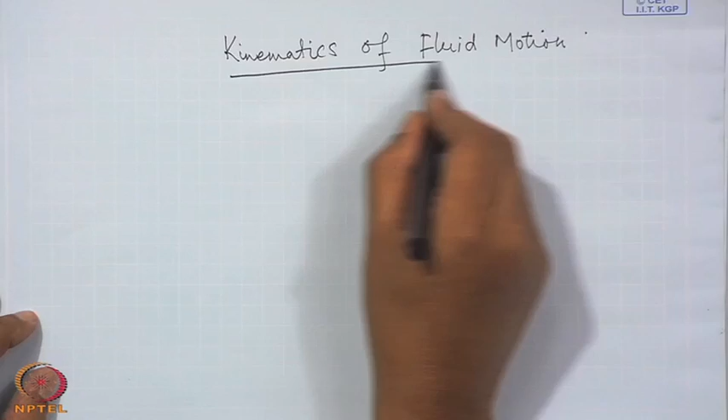So, in this Lagrangian description, what we do is define the velocity of a material fluid element.

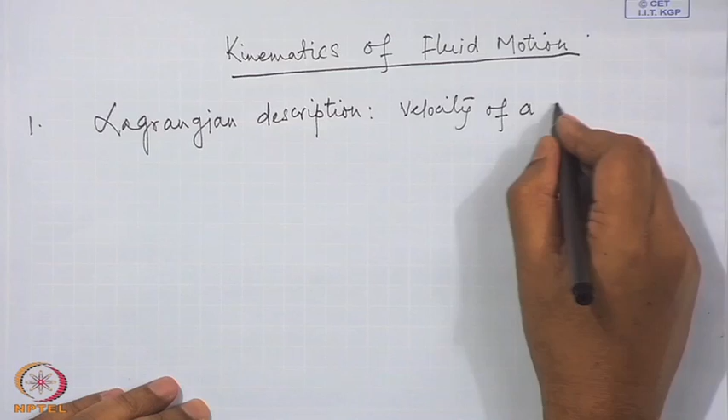When you see the word element, what we mean is basically an infinitesimal volume of the material or of the fluid here, infinitesimal in the macroscopic sense, not in the microscopic or molecular sense.

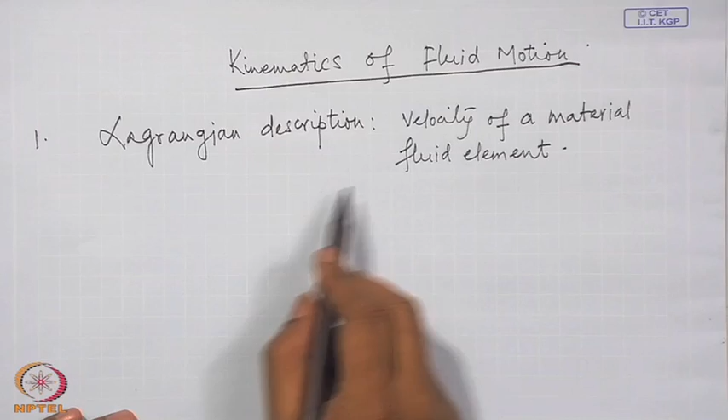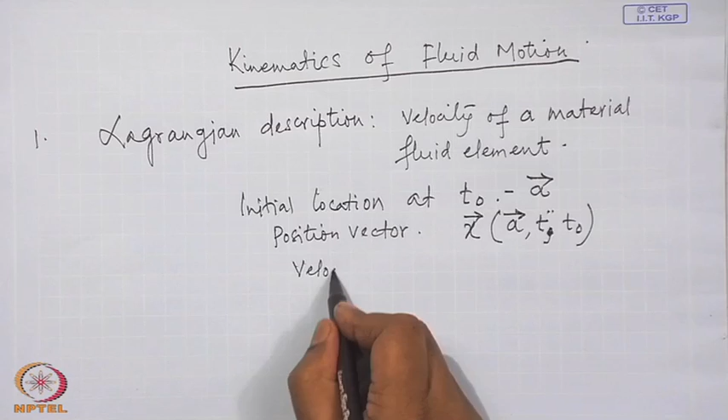The position vector of a particle which was at a location, the initial location of the particle, is the identification, location at say time t0. Then the position vector with respect to that, you may denote it by anything, say x, for that fluid element which was at this location. Then at a subsequent time, the position changes, and the velocity, as you have already defined, let us call this v, or v_i, is as before.

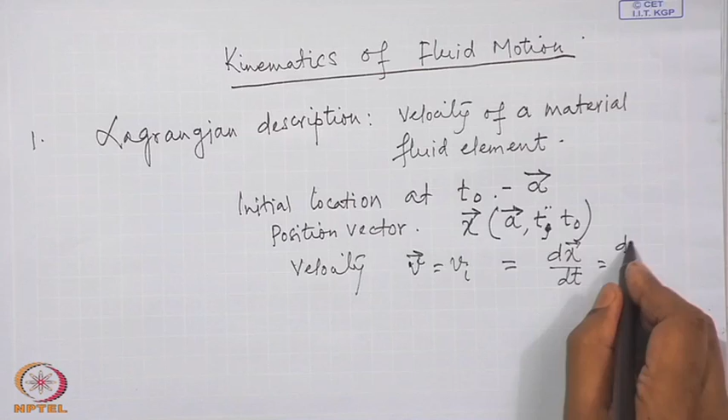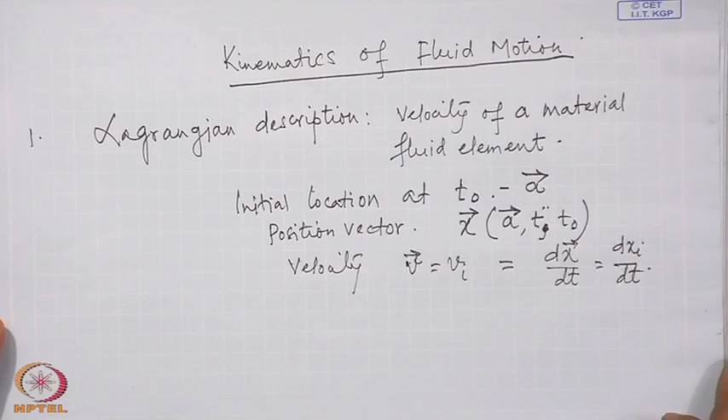Very simple description. However, this description is not very popular in fluid mechanics. We will later see that if we use this Lagrangian description of fluid motion, even the dynamical equations will appear simple. However, they will just appear simple, but they are much more difficult to solve, even though they appear simple.

Also, in the case of fluid, since there are an infinite number of elements and the relative motion between the fluid elements is quite large, to describe a fluid motion you have to identify a large number, an infinite number, of fluid elements and describe their motion, which is also quite cumbersome.

Also, we will see subsequently that often the flow will be defined as steady state flow, and describing steady state flow in the Lagrangian concept will also involve some complexity. So, this Lagrangian description is usually not the preferred description in fluid mechanics. Of course, there are certain cases where Lagrangian description is used, but most often another concept is used to describe the fluid motion. This other concept is known as the Eulerian concept.

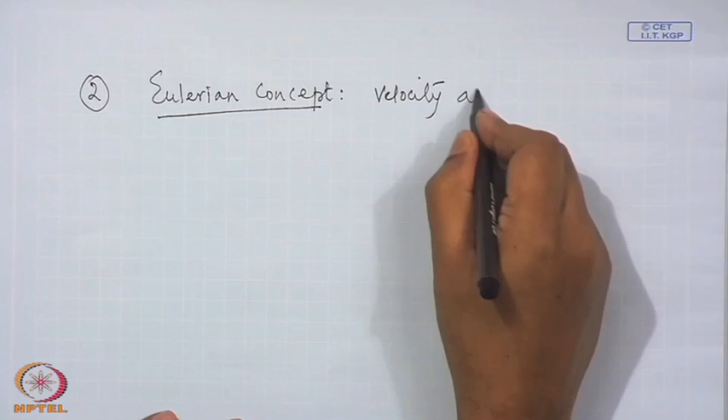What is done here is that the velocity is defined not for a particular fluid element, but at a point in space. So, velocity at a point in space and time, velocity at a point in space, at any instant.

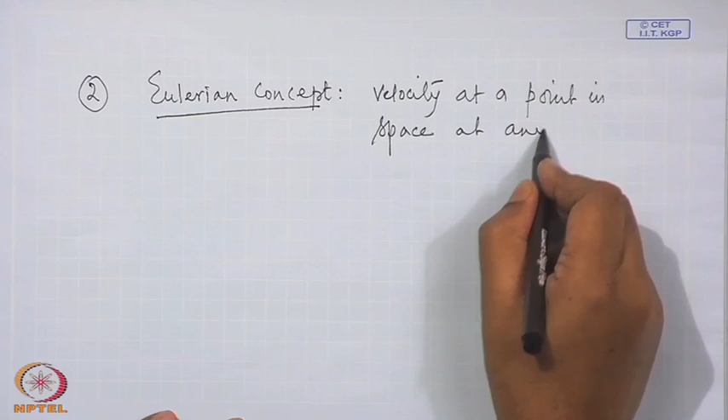That is, you identify or locate the point, say this point x, y, z or x1, x2, x3. So, the velocity at that point, how much is it? Just like a field description, we are treating velocity here as a field. The velocity field assigns a certain velocity at each and every point in the flow field. The velocity at this point is this much. It is not fixed to a particular particle, it is fixed at a point.

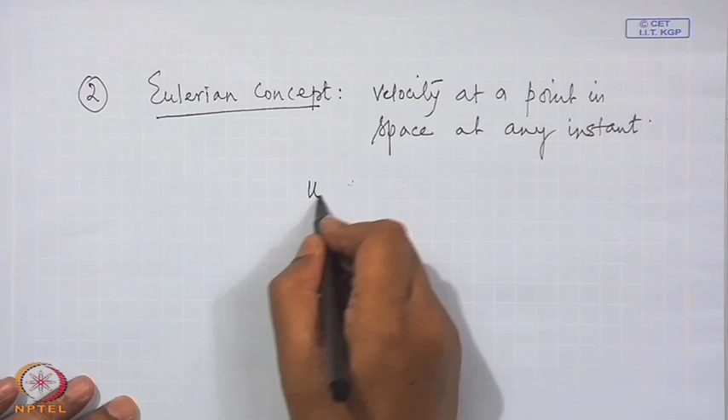Any particle which passes through that point at that instant, while it is passing through that point, will have that velocity. So, here the velocity will be defined by u as a function of x and t, or in our indicial notation, u_i(x_i, t). Now, x, y, z, remember in this case this x is not the position vector of a particle, but just a point in the space.

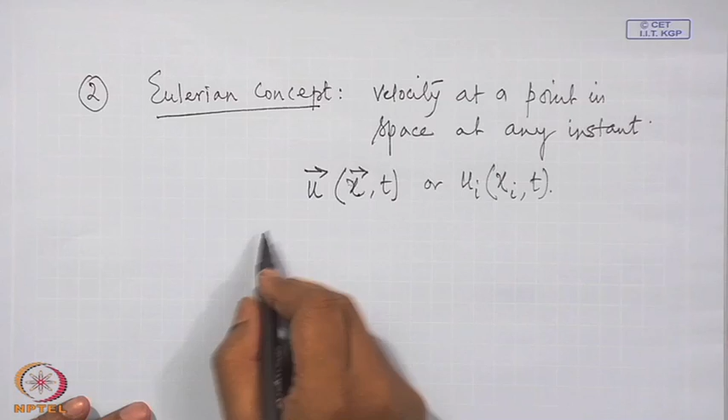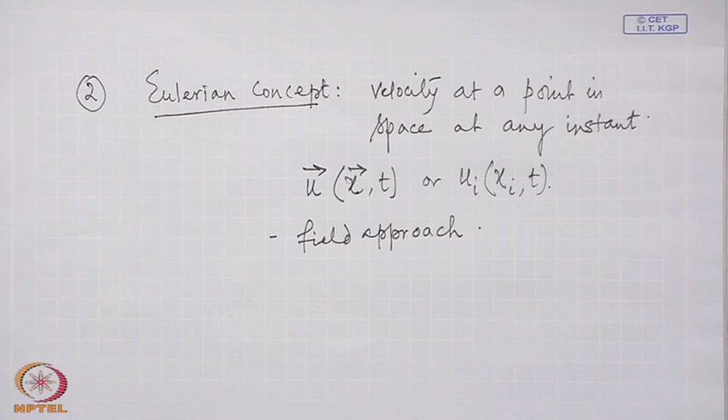Field approach. These two approaches are often called, this Eulerian approach is also called a cinematographical approach. It is like a cinema - you are focusing only on the screen, what is happening there, not anything else. Here also you are focusing at a point in the flow, not the particle - what happens to that particle, where it is going, that is secondary. Your primary interest is a particular position in space.

Similarly, the Lagrangian concept is also called a historical approach, where you look to the history of the element.

Now, associated with this point concept, you can also have a line in space, or a surface in space, or a volume in space. The surface in space is known as the control surface, and similarly a volume fixed in space is called the control volume. So this concept is also sometimes called the control volume approach.

We will see that the dynamical relations often need the acceleration of the particle or acceleration of the body, which is quite obvious or natural in the Lagrangian concept, because in Lagrangian description we are using the velocity of the particle. So if we differentiate with respect to time, we get the acceleration of that particle. Of course, while differentiating, you have to always remember the initial position by which the particle is identified.

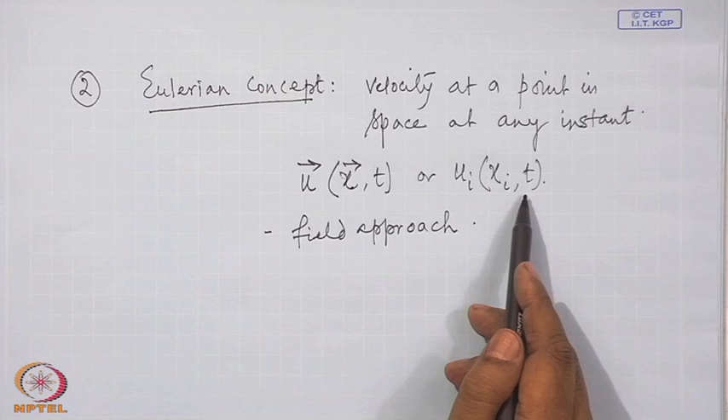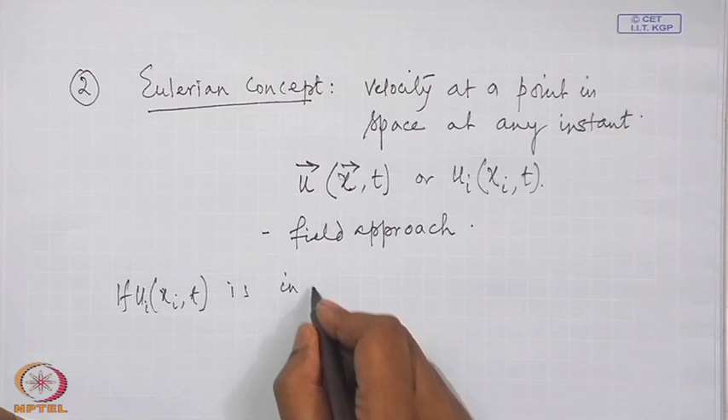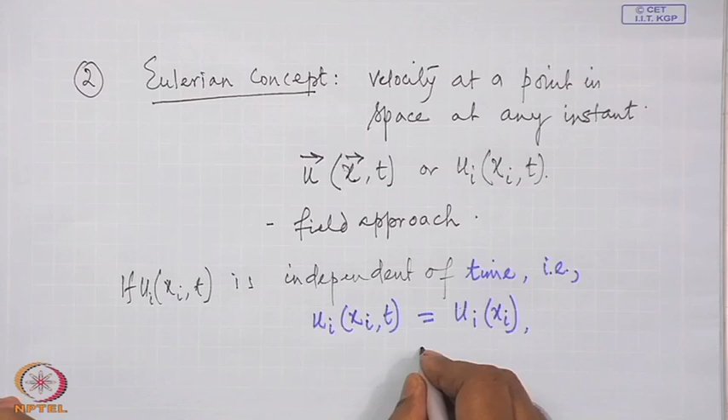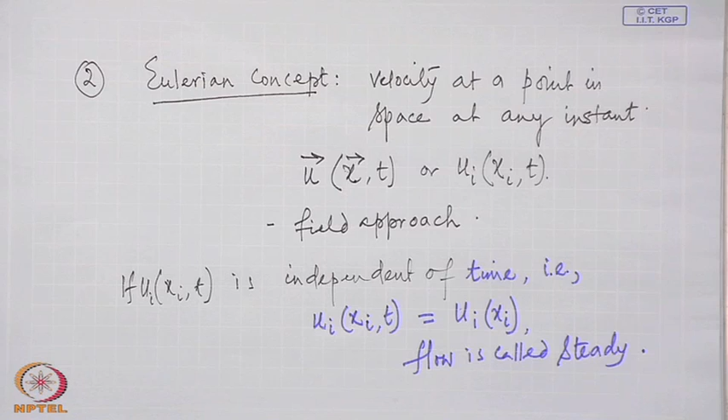Now, for a Eulerian description, if the velocity field is independent of time, that is this u_i(x,t) is independent of t, then the motion is called steady flow. And similarly, if it depends on time, that is at each and every instant the velocity at that point is changing, then the flow is called unsteady flow.

Three lines in flow are very important concepts. The first one is called the streamline - there is no real first, second, and third, you can call any of them first. Streamlines are those lines to which the velocity vector at each point is tangential. The velocity vector is tangential to each and every point on the line - lines that are tangential are called streamlines.

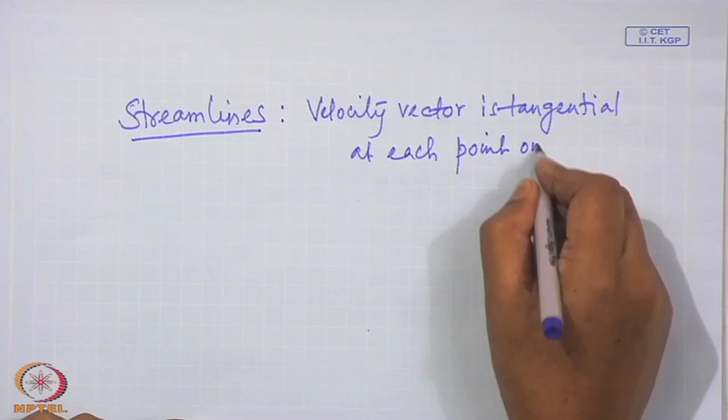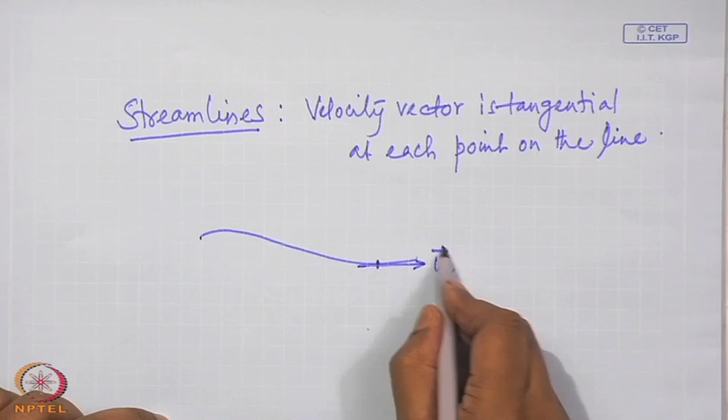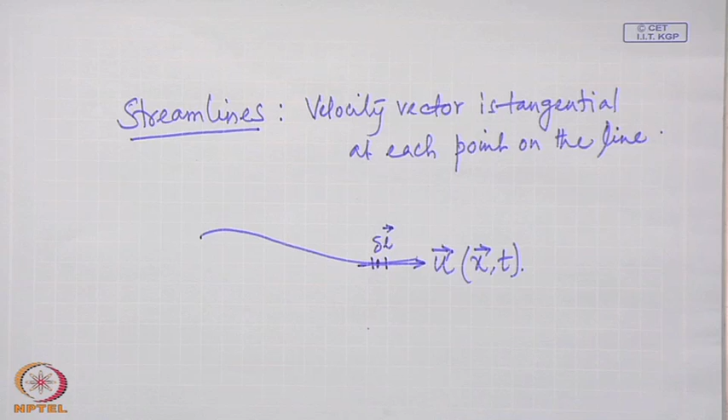So let us think about a line, and at this point we consider a point about x location, and let us say this is the velocity vector. We may consider a small line element delta L. Then what will be the relationship between u and delta L? Is there a relationship between u and delta L? No relation? Yes - complete it, yes. Cross product is 0. U cross delta L is 0.

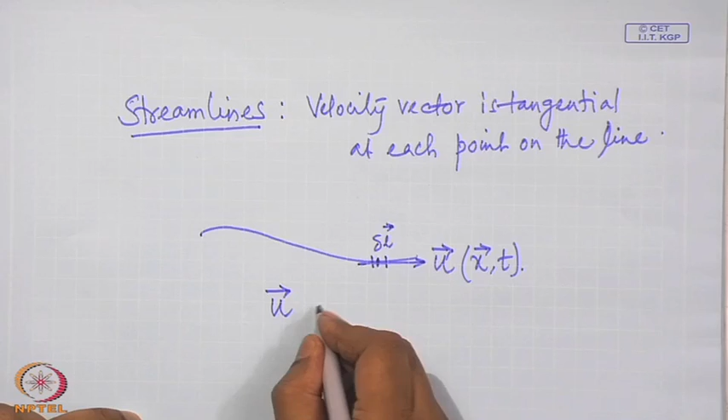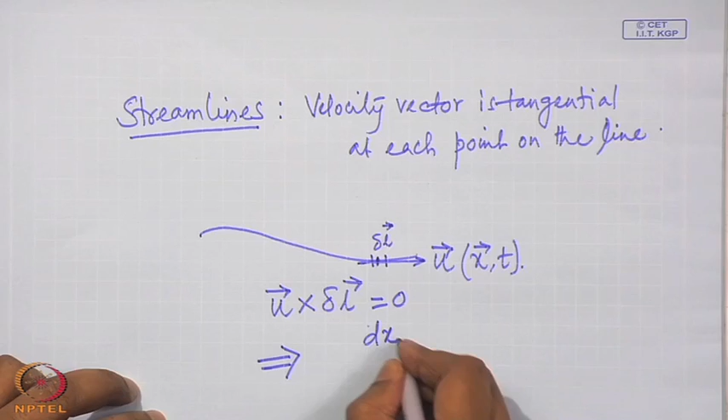Which of course we can write as dx1. This u1 as a function of x and time - I am not writing that x and time all the time. It is to be understood that u1, u2, u3 are all functions of position and time.

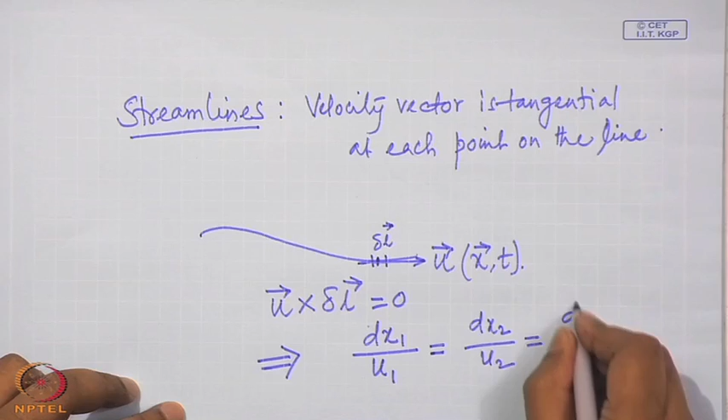So you see that this way you can find the equation of streamline. If you know the Eulerian velocity components, you can easily find the equation of streamlines. Streamlines are very, very useful to describe fluid motions.

So these streamlines will be a function of time? Yeah, these streamlines will, if the velocity field is a function of time and unsteady, then the streamlines are also unsteady. The streamlines will change from time to time - at each instant we will have a different set of streamlines.

The other line is called the path line. These are simply nothing but the trajectory of the fluid particles - the path followed by the fluid particles or the fluid material elements.

Just to differentiate, a fluid element which really consists of particles of fluid, we will usually call that a material element, material volume, material surface - meaning the volume is composed of only certain fluid particles. A material surface is a surface formed by certain fluid particles, while a volume, when you just call it a volume, will just mean a spatial volume, a volume in space. So the path lines are trajectories of fluid particles or material fluid elements.

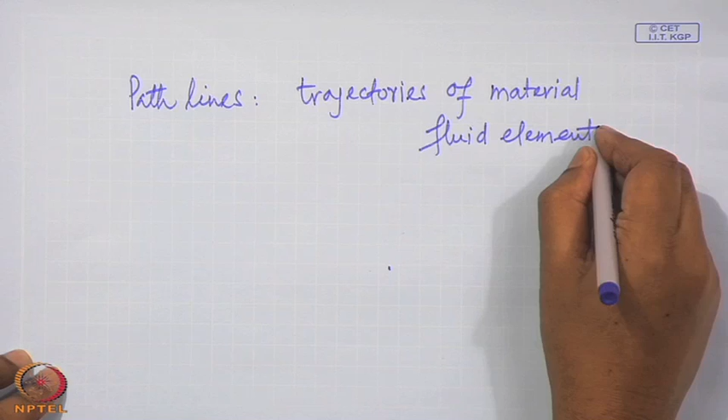If you use Lagrangian description, this is of course quite straightforward, as you have found trajectory of various bodies in your mechanics course. The same approach when you are using Lagrangian description, that is when you are defining velocity of material fluid elements, just integrate it and get the trajectory.

The approach will be similar even in case of Eulerian description. Only thing now you have to assign that, see, even the Eulerian velocity at a point is also the velocity of a material element at that particular instant when it is passing through that point. The Eulerian velocity is assigned to a particular point in space. Now, imagine a material element passing through that point at that time. So, at that instant, that material element also has the same velocity.

What is the velocity at that point? Now, fix this material element and integrate. So, while in this case also there is an integration involved, but this integration is with respect to that fixed material element.

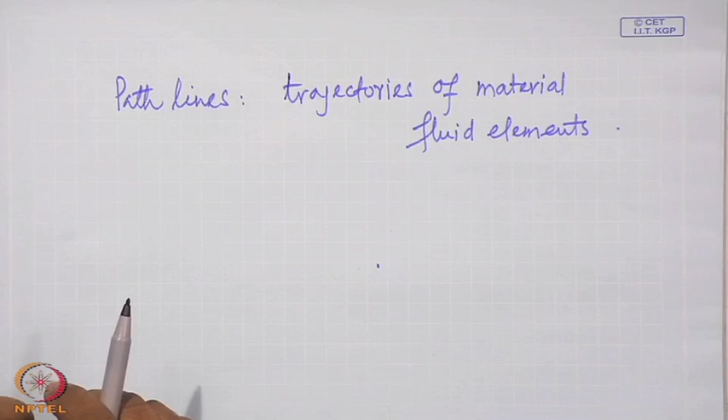So, there is the third line which is known as streak lines, which is very important as far as physical observation of the flow. If you want to observe the flow in your experiment, this of course, you will be doing in your experimental or laboratory classes in aerodynamics, and they are called the streak lines.

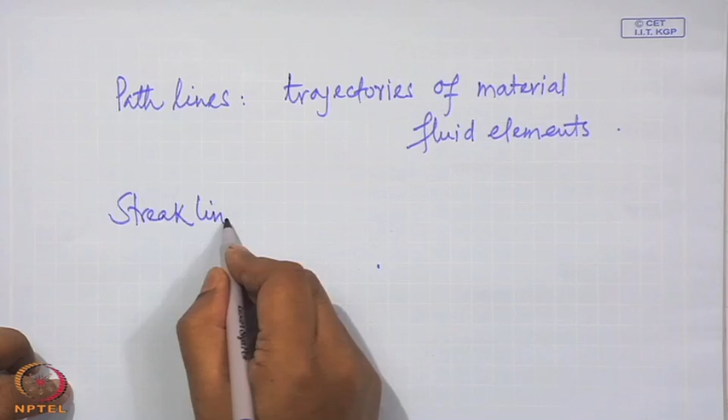Can you suggest how can you see a flow of air? Okay, inject some colored dye, inject a dye, fine. Now, you will inject at certain point, just think that your injection facility is such that you are injecting at a point. Then what you will see? You are injecting dye at a particular point in the flow. What you will see? This dye will spread.

Since you are injecting at a point, it will spread in a line. What is this line? This line is called the streak line, but what is this line? Is it a path line? See, path line is the path of a particular trajectory. Is this streak line a path line? Not in general. For special case it can be, we will tell you what the special case is, but in general it is not.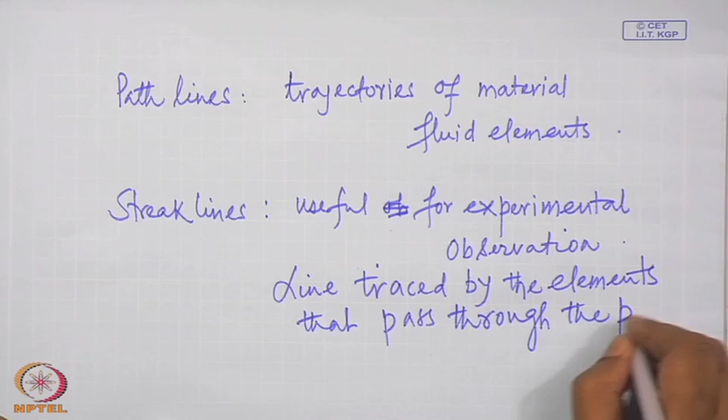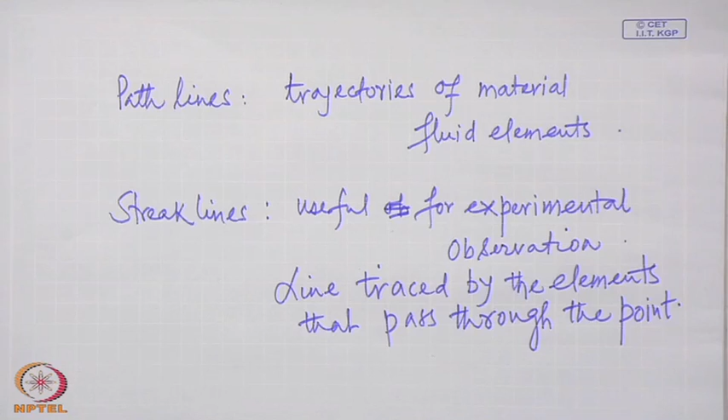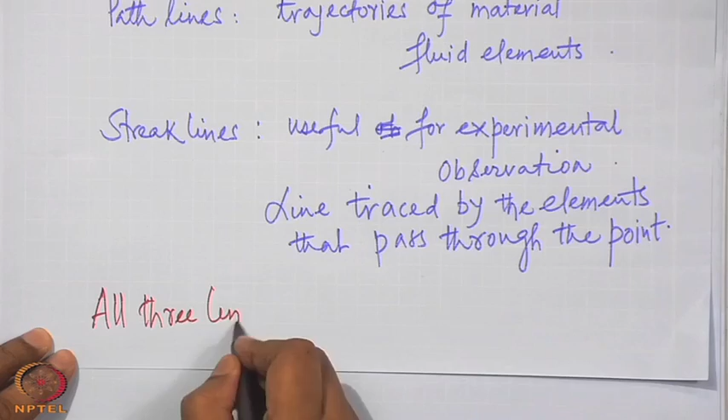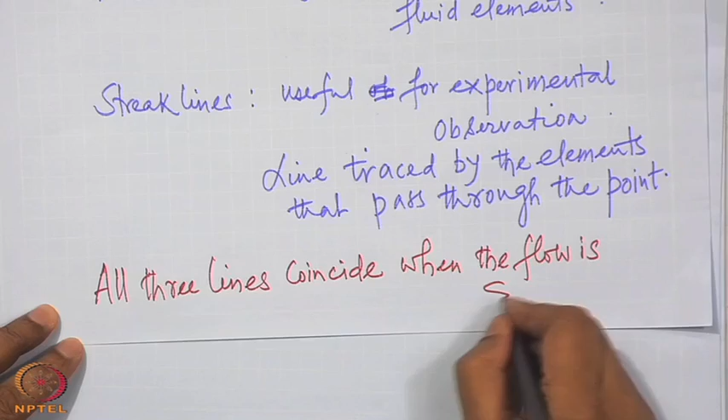That pass through the point. All three lines coincide when the flow is steady. That is, streamlines, path lines, and streak lines become the same when the flow is steady. In unsteady flow or in time dependent flow, the lines are separate and each set of lines changes with time. That is, the path lines also change with time, the streamlines also change with time, and streak lines also change with time.

In our fluid dynamic analysis, most often we will consider two dimensional flow. So, now we say what exactly we mean by a two dimensional flow.

When we say two dimensional flow, considering your Cartesian coordinate system x, y, z, it does not mean that there is no z direction. No. A two dimensional flow, we can say, is one where the flow velocity is everywhere at right angle to a certain direction, so that we can define our coordinate system such that the component in that direction to which it is perpendicular is 0.

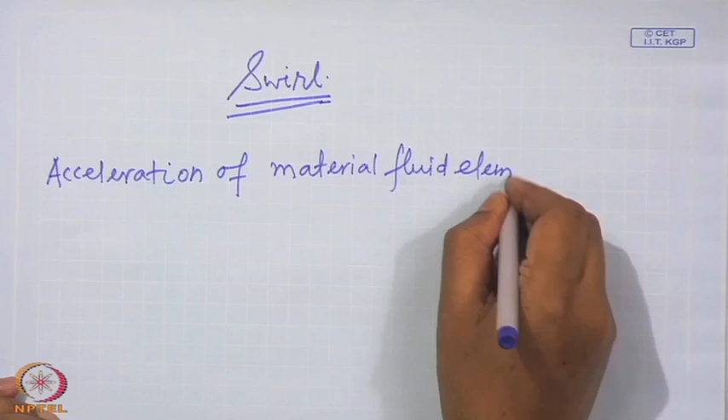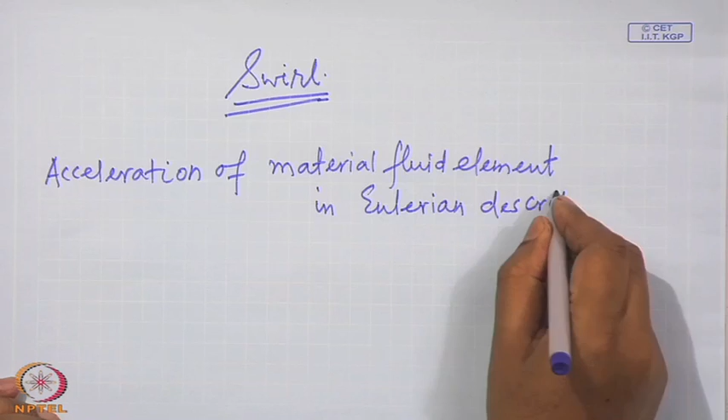In Lagrangian description, as mentioned, it is quite straightforward. You have the velocity of the fluid element, the material element, and you simply differentiate it with respect to time, or differentiate twice the position vector of the element. In Eulerian description, it is a little different.

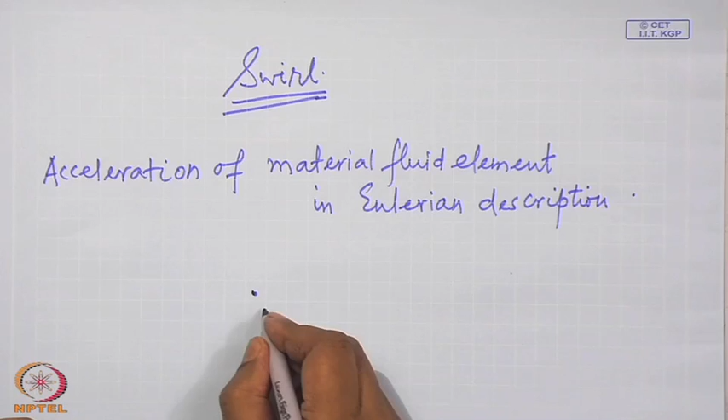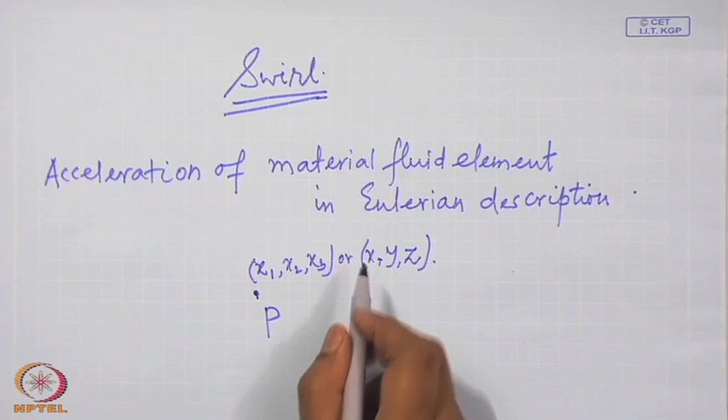First, let us consider a position here. Let us call this position P. Consider the fluid element that is passing through this point P, with coordinates x1, x2, x3, or x, y, z, whatever it is. This is the position of a material fluid element which is passing through this point at a time t.

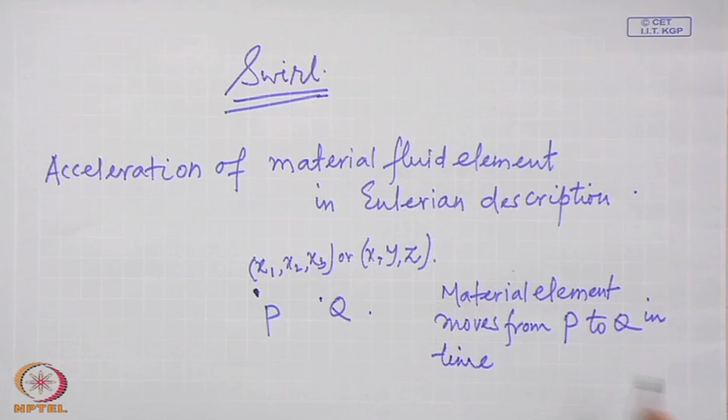A little time later, at t plus delta t, this element will move to certain other location, let us say to another location Q here. The material element moves from P to Q in a small time interval delta t.

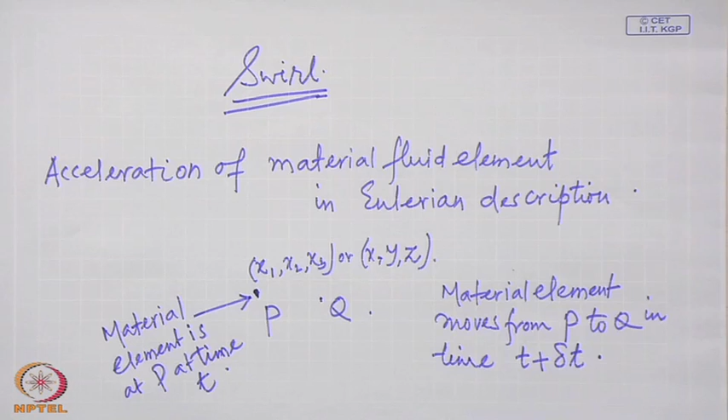Now, at point P, let us say the velocity at point P is u. The velocity at point P is u, which is of course a function of x1, x2, x3 and t, but every time we will not write it out, though here we have to write it anyway. At Q, which is a different point, the velocity is different.

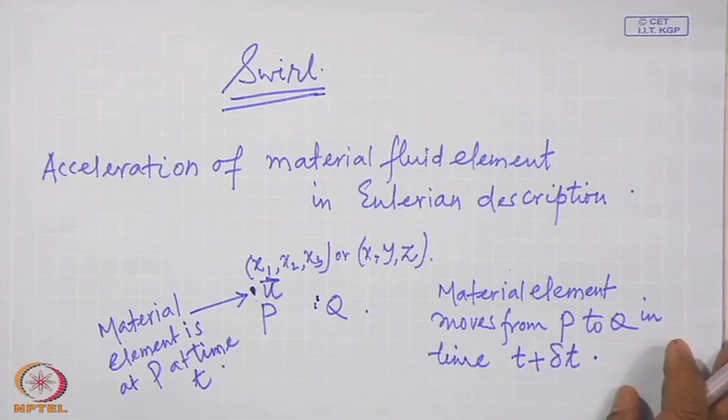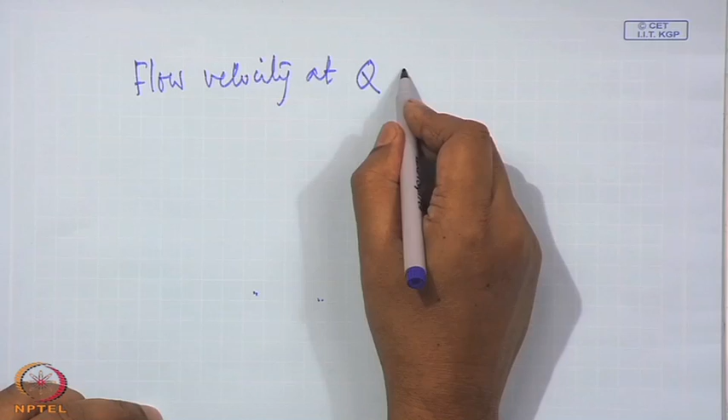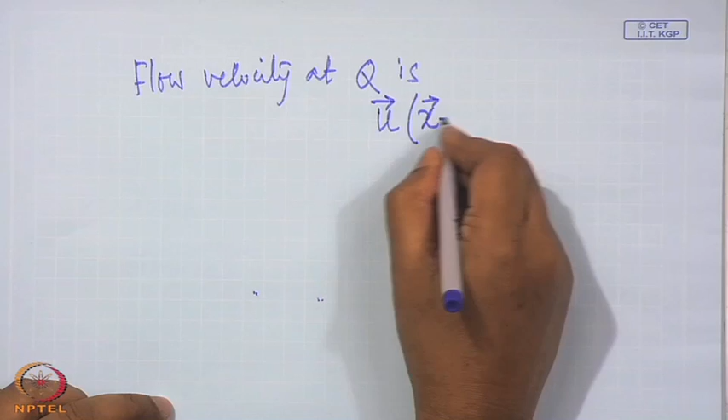Now, what will be the velocity at Q? You can write: flow velocity at Q at the same time t. This is the flow velocity at Q at time t.

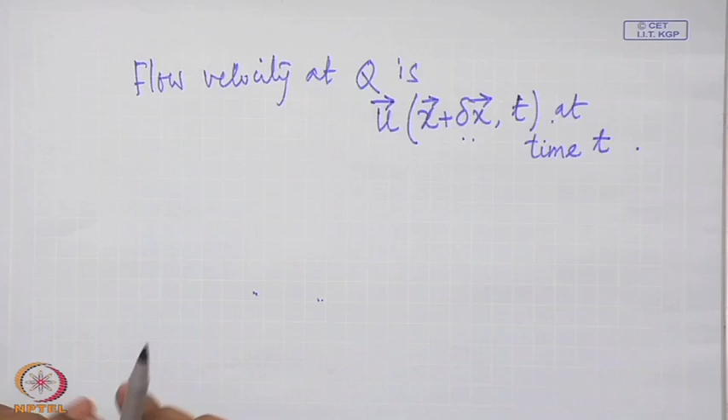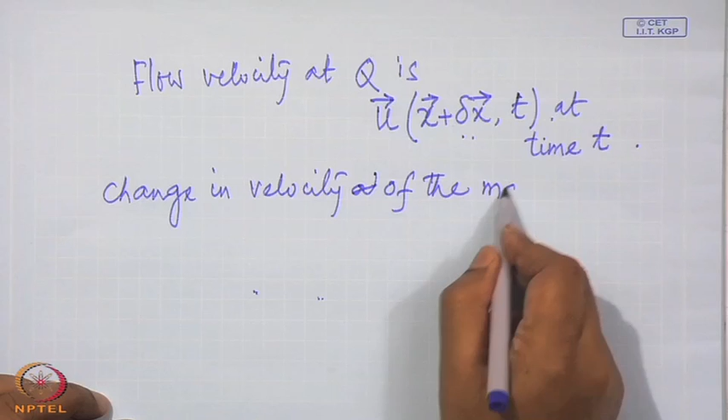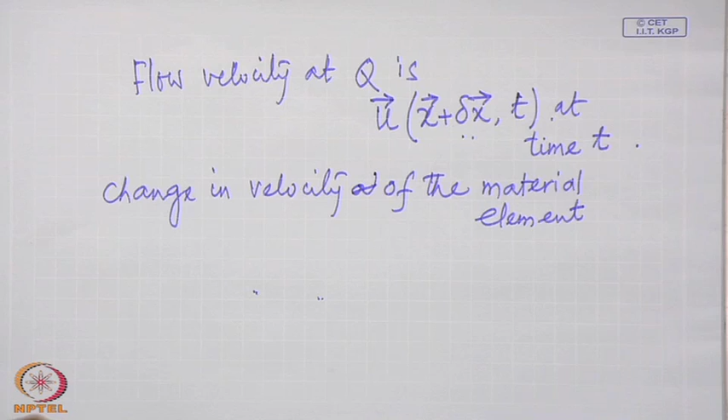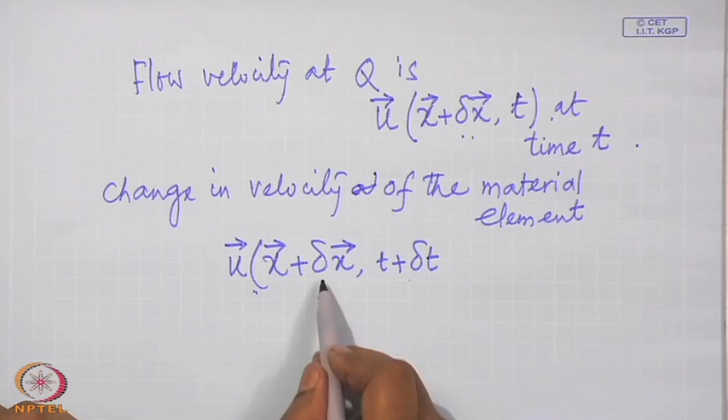However, the material element reaching this point is not arriving at time t, but at t plus delta t. So, the change in velocity of the material element will be how much? This is the velocity at point Q at time t plus delta t, minus the velocity at point P at time t.

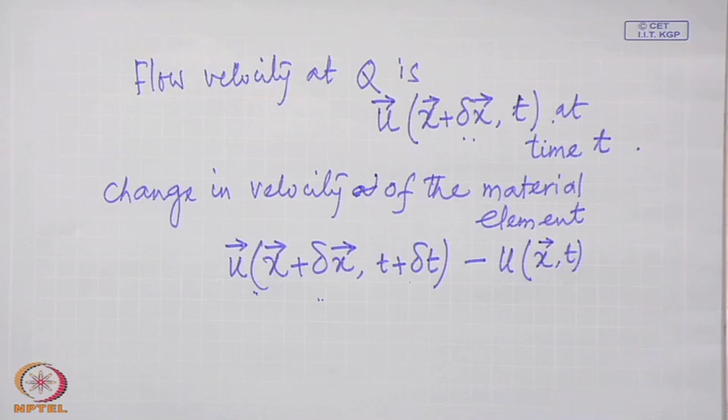Now, this difference can of course be very easily found by Taylor series expansion. Are you familiar with Taylor series expansion? Let us say, Taylor series expansion.

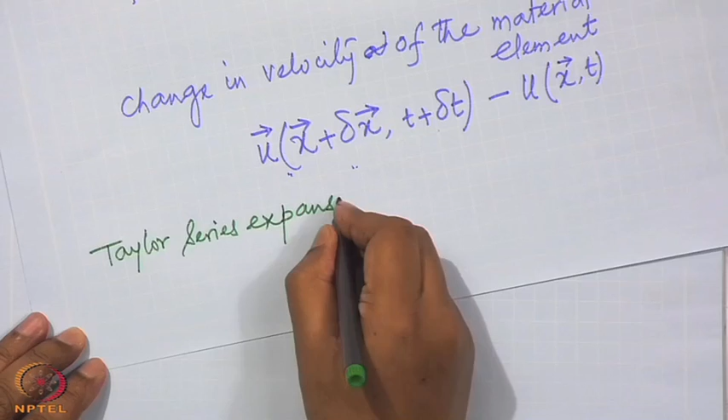You have done it for several variables, or for single variables? Several variables, okay. First of all, let us write it for a single variable; the several variable case is just an extension. Taylor series expansion, that is a function of...

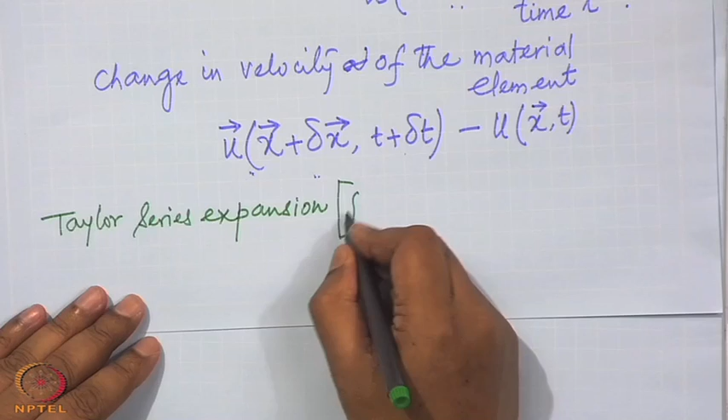x plus h, is how much? Function of x, or say x0 if you call it: x0 plus h, df/dx at x0, plus h squared by 2 factorial, d2f/dx2 at x0, and so on.

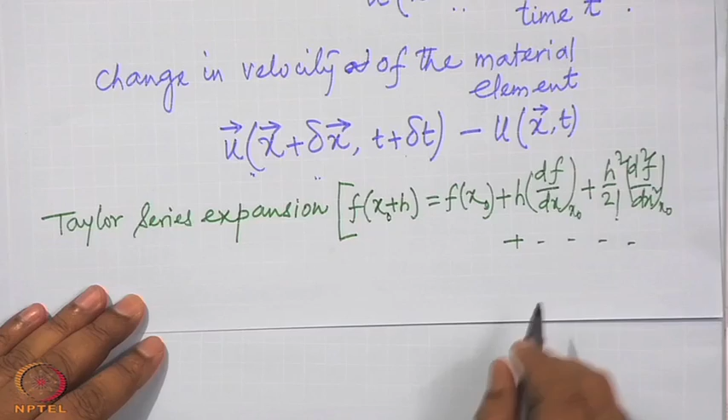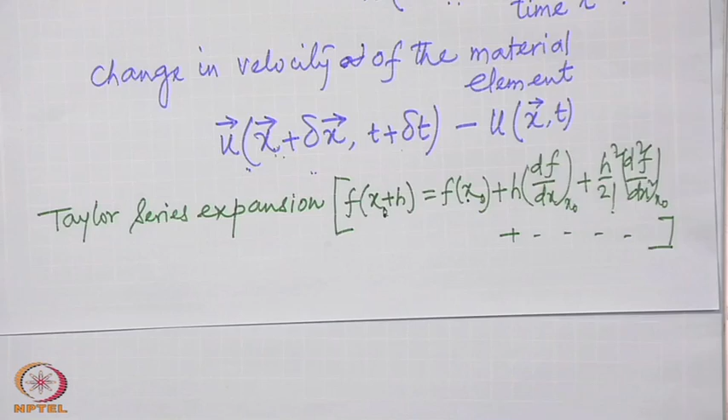If we take the first term on the right hand side to the left, that is what this velocity difference expression is. So, the difference can be obtained by writing all these terms.

Now, see this delta xI, what are they? The particle, the fluid element, has moved this much distance in time delta t. At point P, the fluid element has velocity u1, u2, u3, or u, v, w, whatever you call it, and in time delta t it has moved the distance from P to Q.

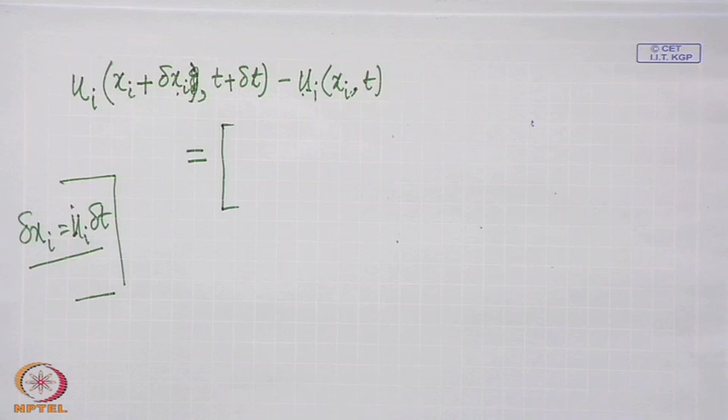So, what is this in Taylor series? The first term, the first derivative term. There are four variables now: delta t, delta x1, delta x2, delta x3.

The first, see this delta t has of course no problem, it is simply du_i/dt into delta t. For the time variable, this is straightforward: du_i/dt delta t, plus it will again be du_i with respect to dx1, dx2, dx3, not simply du_i/dx_i.

du_i, because for u equal to u1, it will be differentiated with respect to both x1, x2, x3. Similarly, u2 will also be differentiated with respect to x1, x2, x3. So, the index of I and the index of x is not the same, they are different. For every index of u, the index of x will vary.

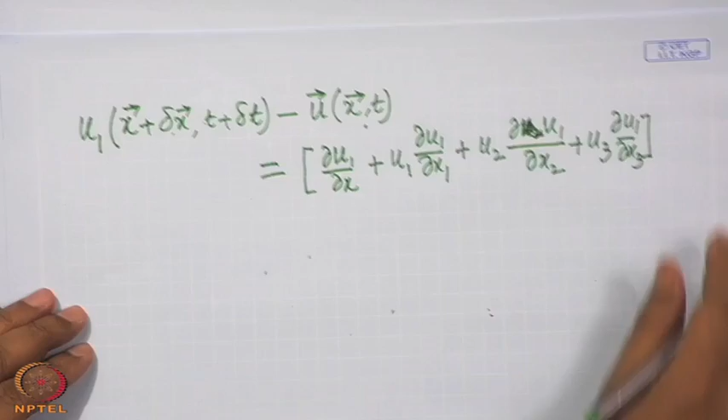The first term is of the order of delta t, and the second term, without writing all details, we will simply write as something multiplied by delta t square, and so on. First term del u1 by del t.

Now look at these indices. You see this u1, du1, dx1 - this multiplying component has the same index as x, while this quantity u has a fixed index 1. But this is u1 x1, u2 x2, u3 x3. So we have got what the general index will be.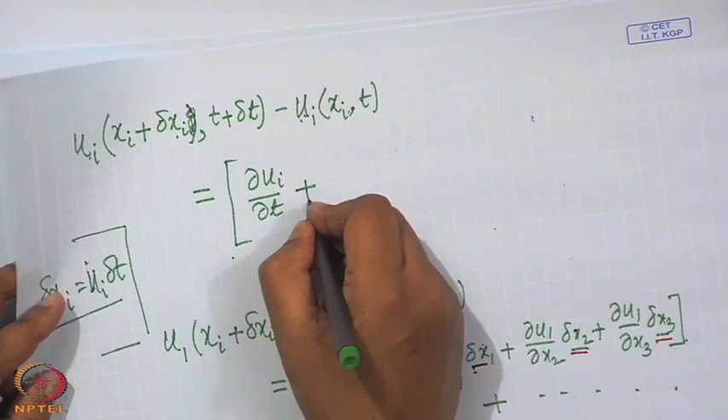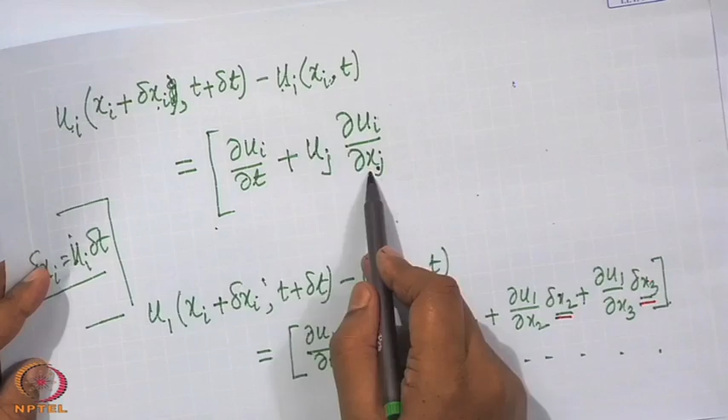So now we can come back and complete this equation. Instead of writing all those terms, we can write, if you look at that, uj dui/dxj. Agreed? This multiplying u has the same index as the x, meaning it is a sum over them, and we are getting all these three terms by writing this into delta t plus something which is of the order of delta t square and so on.

So this is the change in the velocity of the fluid element over a small time interval delta t. Divide this by delta t, and in the limiting case of delta t approaching 0, we get the acceleration. So acceleration of the fluid particle then becomes - this divided by delta t, and then let delta t approach 0. You see that all these terms will approach 0, because when you divide by delta t, this will still remain delta t. However, there will be no delta t here.

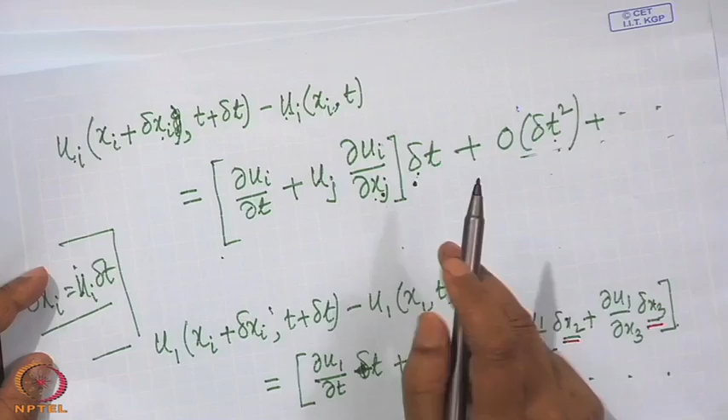So now we get that in the limiting case of delta t approaching 0, [u(x plus delta x, t plus delta t) minus u(x,t)] divided by delta t is simply the term dui/dt plus uj dui/dxj. So this is the acceleration of a fluid element in Eulerian description.

Since we are considering acceleration here, can we assume that delta x1 is u1 delta t? That is what we have. So is it contradictory also? No, see, this delta t is a very small time interval.

Delta t is a very small time interval. But still, I understand what you are saying - if there is an acceleration, how can this delta t assumption hold for a small time? But what we are ultimately interested in is that delta t is approaching 0, so it is a time interval of that size. So for that small time interval, we can still assume it. If it were a finite time interval, of course we cannot do it, but for an infinitesimal time interval, we can still do that.

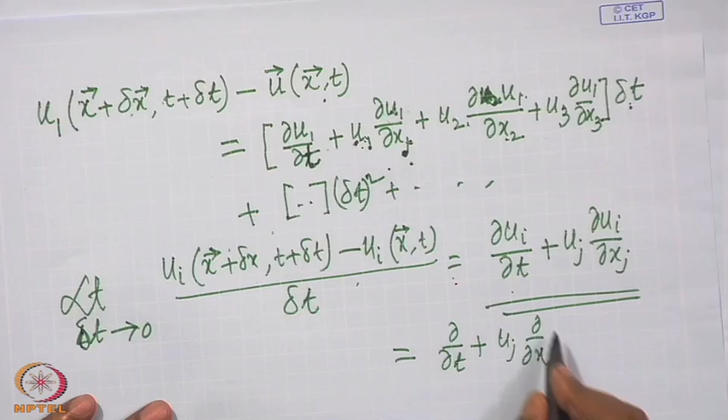So this is the acceleration. This can also be written as - you see that d, instead of being a simple derivative, can be taken as an operator, this entire thing can be taken as an operator.

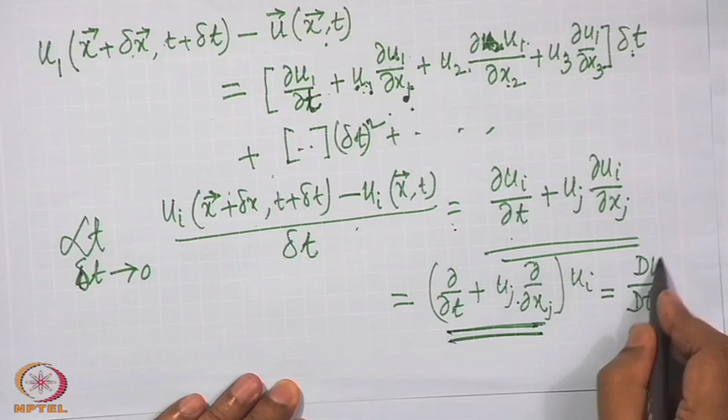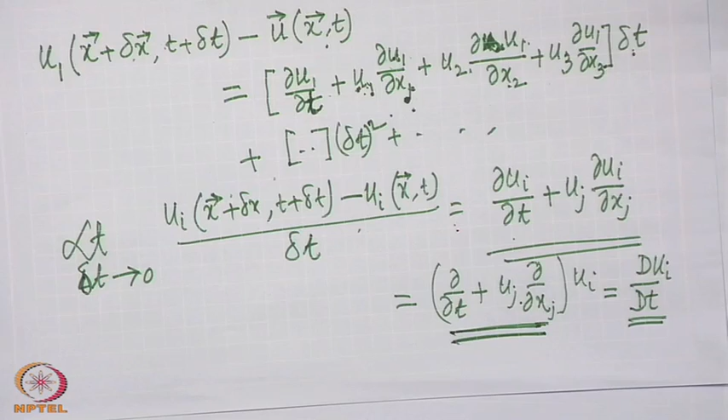And since this is the derivative that we have obtained while following a particular material, this derivative is often called the material derivative or substantial derivative, and it is customary to write it with this notation, capital D. So whenever you see this capital D within the Eulerian framework, it implies that the derivative is computed while following a particular material element.